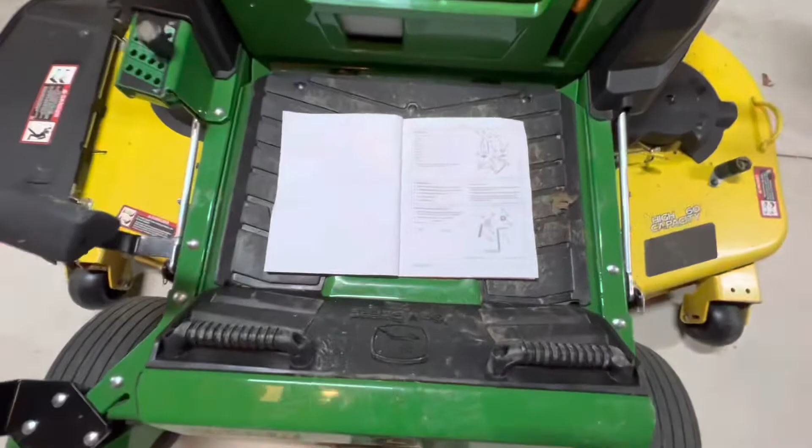These are the parts that come with it. When you do get it, make sure you get the bolts and the lock nuts.

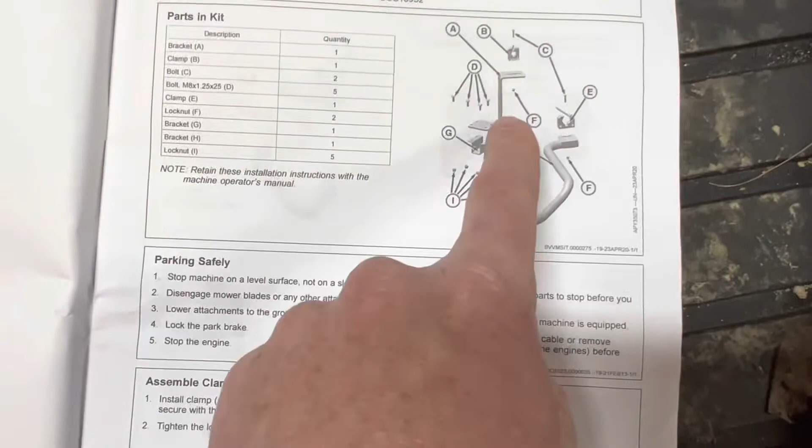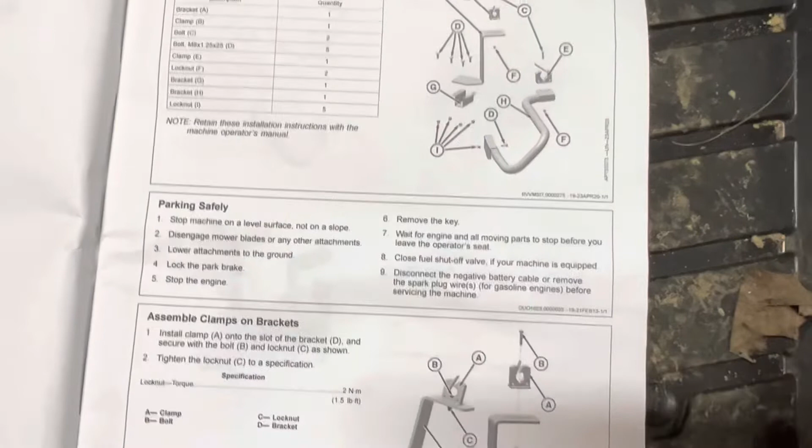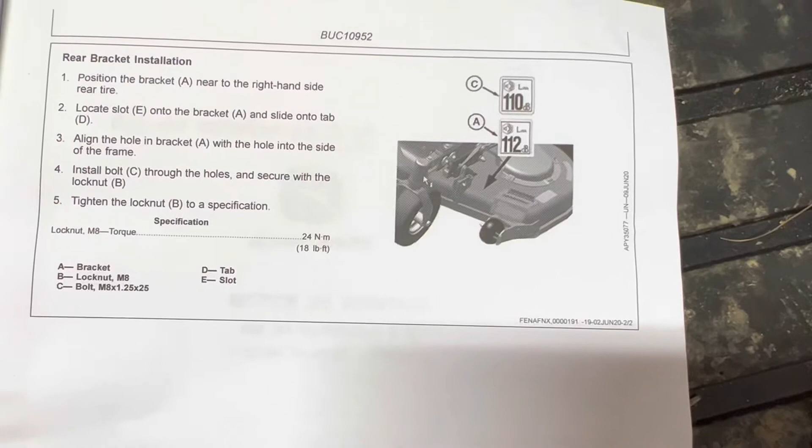The issue wasn't so much getting this bracket, which is mounted on your front right wheel, or right next to the front right wheel. It was this bracket that was not all that intuitive. When you get to the instructions for the rear bracket installation, for whatever reason, they're showing the deck, which doesn't really help that much in my opinion, and it wasn't necessarily intuitive.

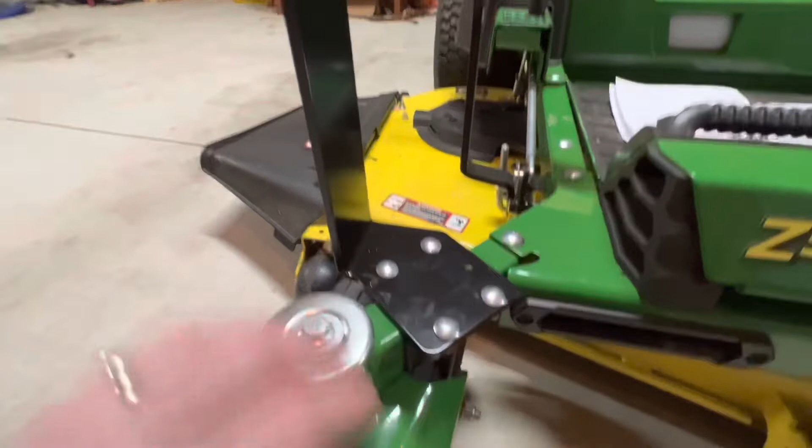So I'll walk you through real quick to where I had it installed. So this is your front bracket. It comes with these little rubber assemblies here, so this just rests on here. Underneath, you've got this little U bracket that goes underneath the frame there. Then you just bolt those on.

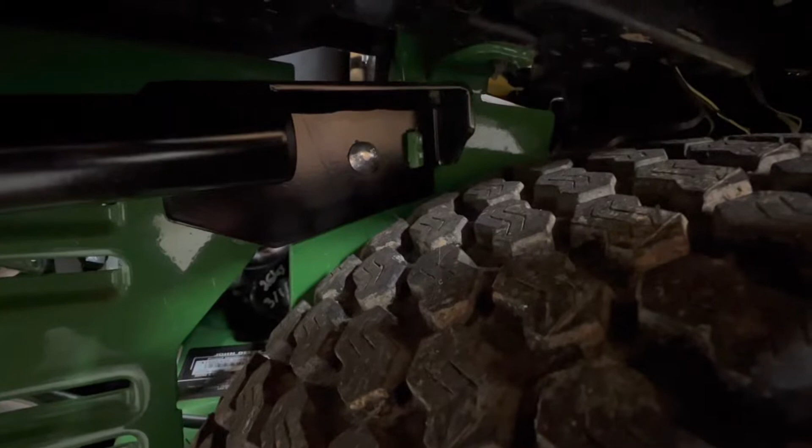That's pretty intuitive. This bracket back here, the tricky part is you have to mount it underneath the back right wheel. You'll see that little green slot right next to that. There's a hole. You'll line up the hole on the bracket and then you'll put the bolt through there. It's got a square underneath the head that'll keep it from turning. And then you'll do the lock nut on the inside in here.

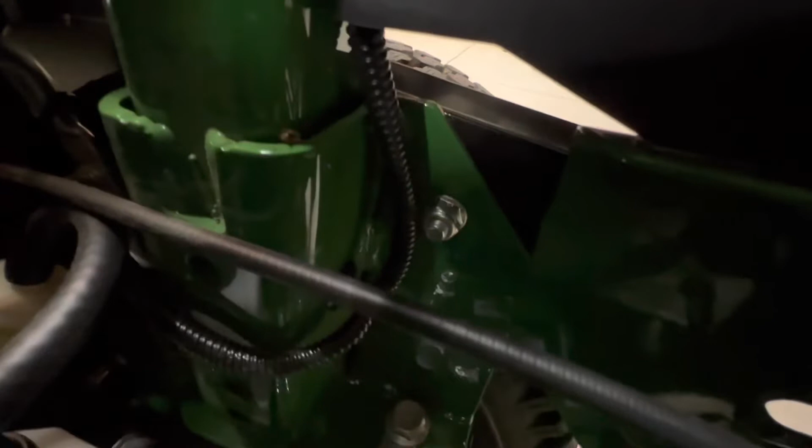And that's it. Once it's on, then you'll be able to mount your trimmer attachment. And there's the trimmer resting in the trimmer mount attachment.